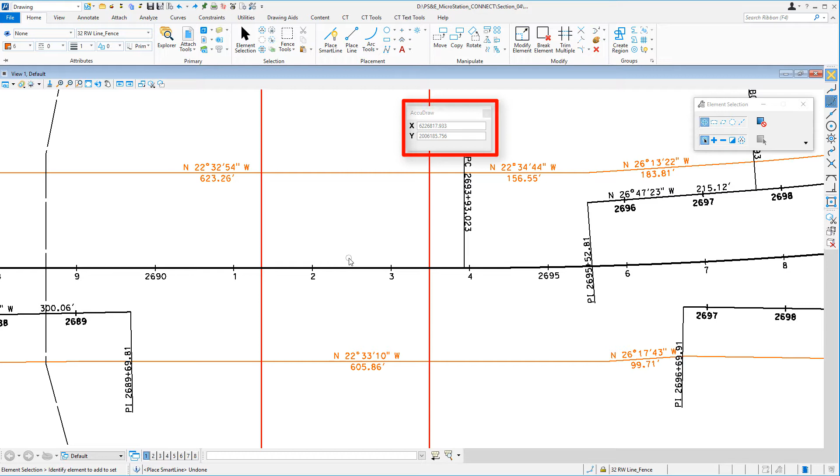And then use the change element attributes, changing it to the correct attributes for a match line. What I'm going to show you is using AccuDraw and also the pop-up calculator to place the match line exactly where it needs to go.

So I'm going to go to my Place Smart Line tool. I need to change my active attributes to be correct for drawing a match line. I'm going to come up to the CT tab, go over to the CT lines, and on the CT line style selector, go to Set Select, and I'm going to be choosing line codes.

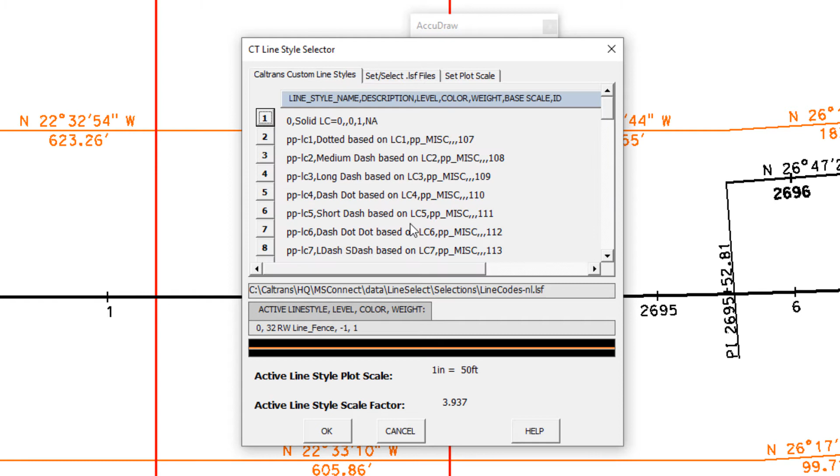Now what I see listed below, I'm going to scroll down. I'm going to locate the match line, click the number, and click OK. And we can see in the upper left, my attributes are set.

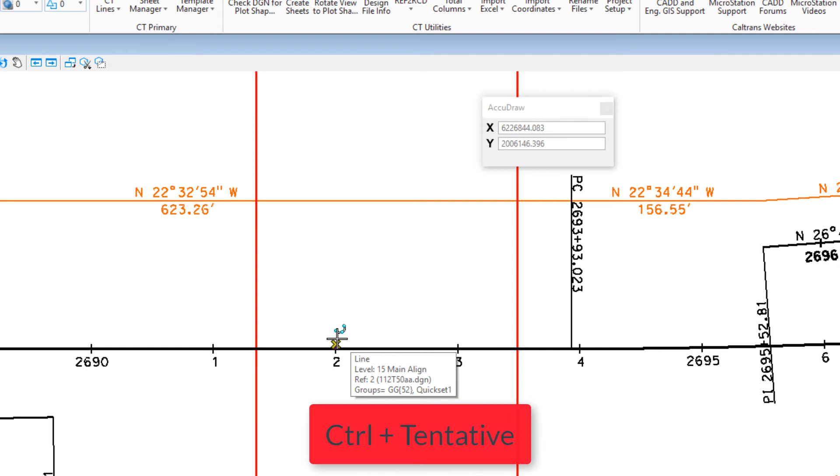Now I want to place this exactly halfway between this station tick mark and this station tick mark. So to get the AccuDraw compass to appear at this station, I'm going to hold down the Control key and do a tentative. That makes the AccuDraw compass appear, what we call set origin.

Now if I move my cursor across to the right, as you see on my AccuDraw window, which I have undocked so we can see it clearly, the distance is 100. I want to go half that distance, so on my keyboard I'm going to hit the / or divide.

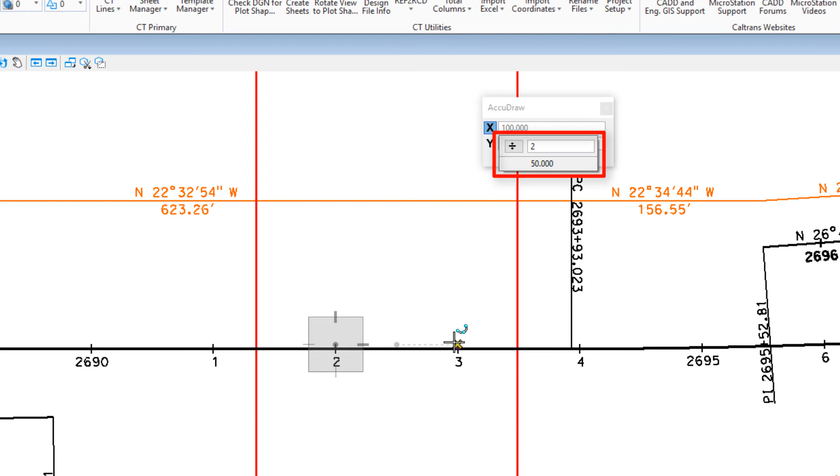You'll see at the AccuDraw window, the pop-up calculator appears. I want to take that value, 100, and divide it by 2, so I type in 2. It shows me it's 50. To accept that, I hit Enter. I've now located that point.

Now I can just move my cursor up and you can see I'm exactly 50 on the X. I'm going to move it up above my right-of-way line, start my line, data, and then just go straight down, making sure I'm indexing. Other side of the right-of-way line, data, reset. Now my match line is drawn.

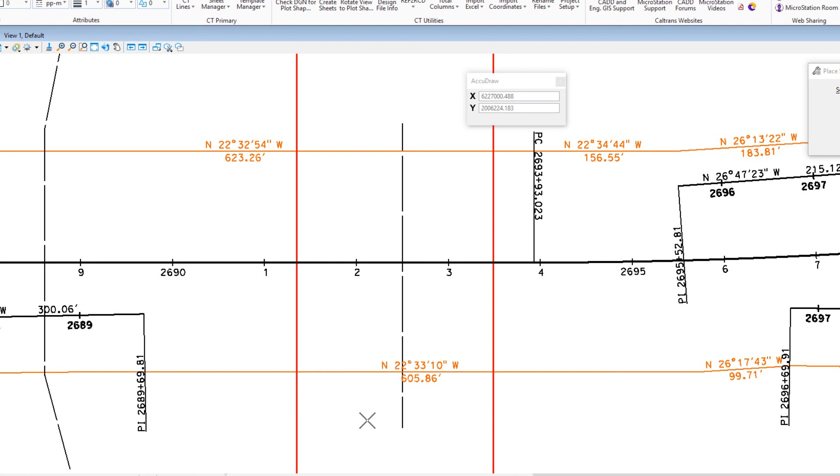I didn't have to copy parallel, didn't have to change element attributes. It's a very quick and simple way for me to do this.